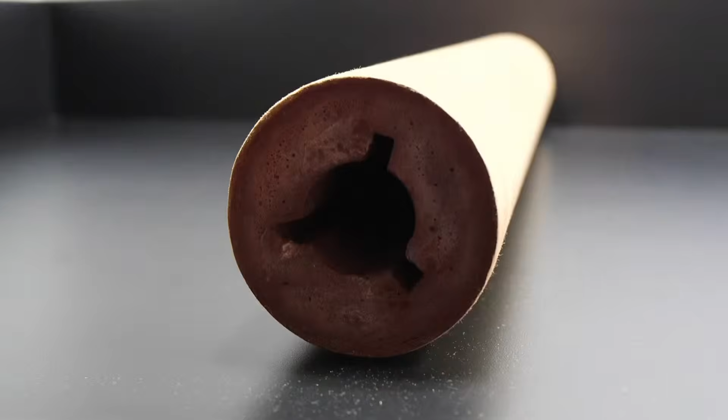So here's the propellant. If you guys haven't seen the video yet, this is how the propellant grain ended up - kind of a spoiler, promise me you'll go watch that video. You can see some of the patchwork on the finocyl side, but that's the grain. I actually don't have pictures in here because I didn't know if I was going to be able to post the propellant video today, so I didn't want to spoil it and show the cracks.

But there are some very small hairline cracks at the forward end, on the other side of the finocyl. It's kind of hard to index what's the forward and what's the back of the propellant, but there are some cracks, some very small hairline cracks.

What I haven't mentioned in the video is that I think those cracks came from the PVC deforming when it got hot - that was shown in the video. Once the PVC deformed, it got a little larger or smaller, and when trying to hit the propellant out, it cracked some of it. I didn't add that in the video because I wasn't 100% sure, but I'm pretty sure that's what it is. After taking out the actual core rod and feeling the core rod PVC, it's kind of wavy - nothing crazy, but a little wavy. I will need to work on that.

So I'm not entirely sure my actual lubricant didn't work - I did the dry film PTFE spray and also petroleum jelly. I thought that was the issue, but I don't think it was. I think it's the actual core rod warping and deforming, which made it hard to get out of the hole.

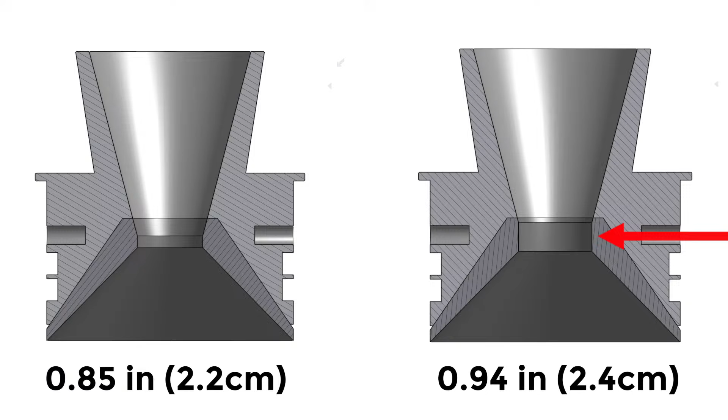I'm very confused with this. I didn't know it would have such little effect on total impulse, specific impulse, and thrust, which is around a 5% reduction. My OpenMotor simulation is pretty good, so I guess I'll believe it, but we'll see when we test this.

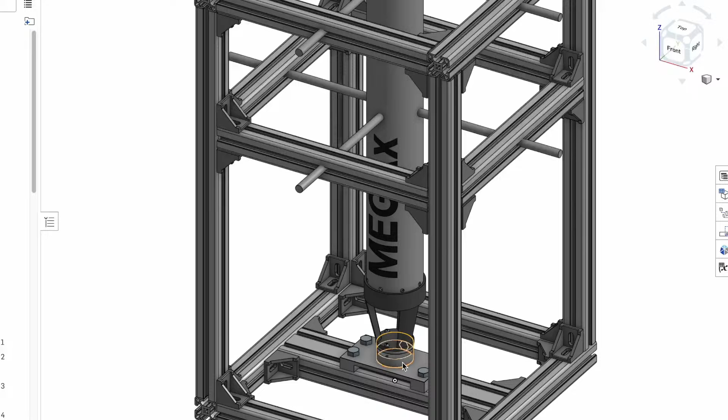4040 T-slot extrusion. If you don't know what 4040 T-slot is, it's what you're seeing in the video, 40 millimeters by 40 millimeters. It's a pretty good material, like Legos for engineers pretty much, because I can move stuff around.

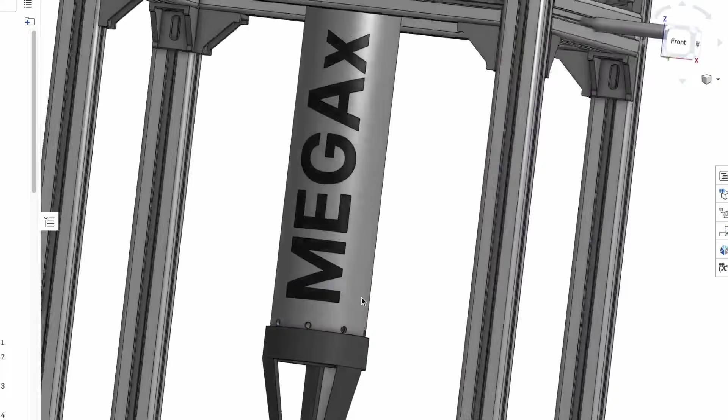You can see some brackets on it. If I pull up the video, you can see the corner brackets, those just screw in with bolts. I don't have the bolts and everything actually on this video, but with those brackets, if I want to make the test stand smaller, I can make it smaller. If I want to make it bigger, I can make a plate to connect two of the smaller T-slot extrusions. So it's pretty cool.

And now some more specifications. It's gonna be around 2.5 feet tall, 76 centimeters, and 1.7 feet wide at 52 centimeters. So it's gonna be a big test stand. I was gonna make it out of wood like my SN series test stand, but this is more adaptable and upgradable over time.

So now the load cell adapter. This is the load cell adapter, as you can see. I had something very similar, I wish I still had it, I just had it on my desk but I moved it. The load cell adapter is what grabs all the force from the actual rocket motor and pushes it down onto the load cell.

So I can get this arrow right here. The load cell's right here, the load cell adapter's right here, then the load cell's right here. And then, what did I call it, the adapter plate. This is the adapter plate too, this is something new that I haven't done yet. I'll talk a little bit more about that in a second.

So yeah, this load cell adapter pretty much allows the thrust from the motor to go through into the load cell. Also, there'll be a pressure transducer sticking out under here, it's not in there, but sticking out right here. So if we didn't have the load cell adapter, the pressure transducer would be the closest thing touching the load cell, and with the thrust it would probably just snap.

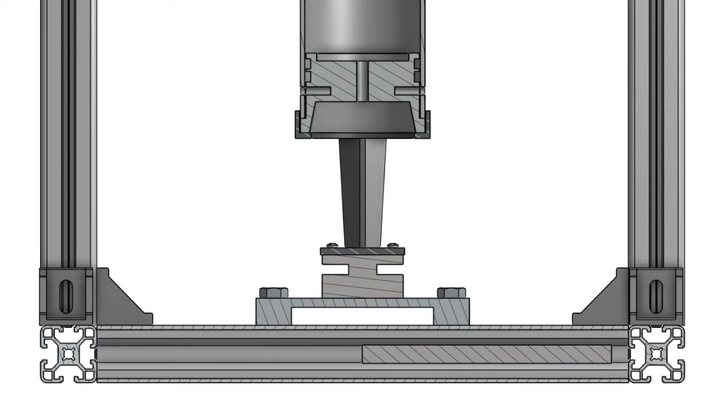Moving on - oh, here's actually a cool cross section, I forgot I had this in here. This is the cross section of what we were just looking at. Here's the arrow. So right here, that's the hole for the 1/8 inch, I think it's still 1/8, or maybe a 1/4 inch NPT thread pressure transducer. This will be threaded down maybe till halfway. I don't have it in the actual CAD simulation because it really doesn't matter, but the pressure transducer will be here down to here.

And this dark black - you can only see one strut of it, but there's actually 3 struts, you can only see one here. This feeds all the thrust into the load cell, which is right here - I'm using a circular load cell, not like an S load cell.

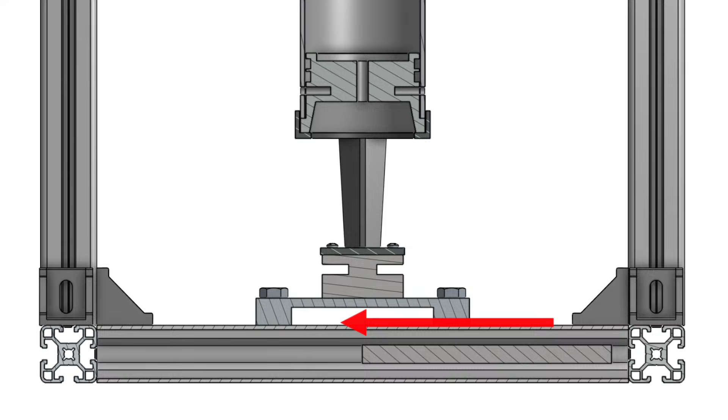And then here's the adapter plate, which will then move the load cell and mount it onto the actual T-slot extrusion, 4040 T-slot extrusion, which I haven't totally figured out how I'm going to mount this plate onto yet. I haven't looked too much into it, but I want to make sure I don't glue it or do anything crazy like that. I want it to be movable, which I'll probably just end up going with.

Yeah, so this is another view - we kind of already got that view. Here's the adapter plate. Right now, this model that I made with the adapter plate was probably made like 3-ish months ago. So I have just two bolts going down through it, which is probably what I will do, and just have an insert. They're hard to explain, I don't know - I honestly don't know too much about 4040 T-slot extrusion because I've never actually used it.

But this little threaded nut that I can slide within the tracks into, to screw down that plate - so that's what it's looking like. This is pretty much the future plan, this is next video's content - building the actual test stand.

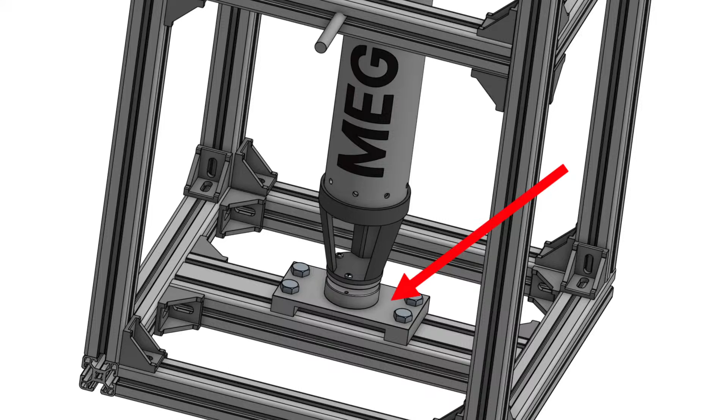On the test stand, currently I'm sourcing parts. The T-slot extrusion, like on Amazon or any US based company, is crazy expensive. So I'm looking at buying it from somewhere in China - it's way cheaper, but the shipping is very expensive, though it still works out to be way cheaper. Like the shipping's about $150, but the actual T-slot extrusion's only like $20 or $30. So they get you back with the shipping, but overall it's still way cheaper than if I were to buy it on Amazon.

I also need 2.5 foot segments of it on AliExpress. Yeah, that's exactly what I was looking at. I'm messaging people right now. I think right now all the T-slot is gonna cost around $50, and then shipping's like $150. So after fees and import fees and everything, I think it's about 250 bucks, which is quite expensive.

But this stuff is used everywhere. Free shipping - I will need to mention that to them because they quoted me like $150 for shipping, which is pretty expensive. But at the same time, all this actual aluminum, I think total was like 20 pounds, which is very heavy for shipping.

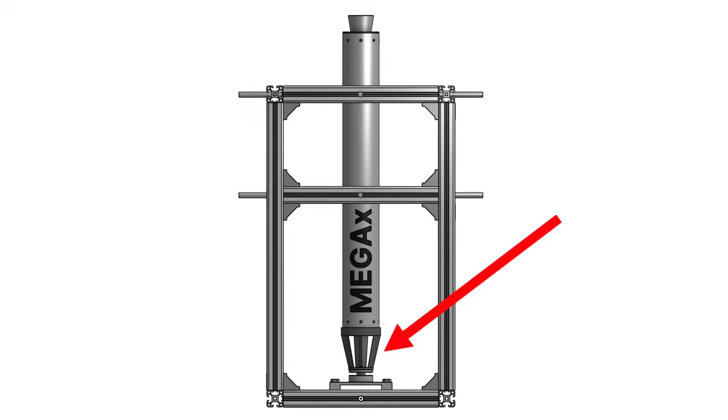More about the test stand - in the future I want to have thermocouples, which are just like thermometers, to take temperatures inside the rocket motor and maybe on the outside, and then that will feed to the Arduino. I also want to mount cameras onto this test stand someday because it's very hard to index video with the data, because the video is just taken from a camera and then the data's filed on the Arduino. So I want to get one camera that films on top of the data to the Arduino so I can perfectly index that video.

I've gotten it really close with the beeps, because I have my Arduino do a beep when it's armed, and then my cameras - you can hear the beep on that. But I just really want to have more cameras, maybe not really high resolution ones, maybe like an FPV camera. I can actually - I'll be back.

I used to fly FPV drones a bunch, so I have a bunch of them. But like just a camera like this - this is actually an HD camera, this is a SharkByte. I love flying these drones, I just haven't had any time, and also the batteries degraded and they're very expensive. So just a small camera like this on there - I can honestly take this camera out, it just unplugs. I got the Mr. Steele props on it, if anyone watches any FPV content. But yes, this is three of them, I built all these, I have a bunch more.

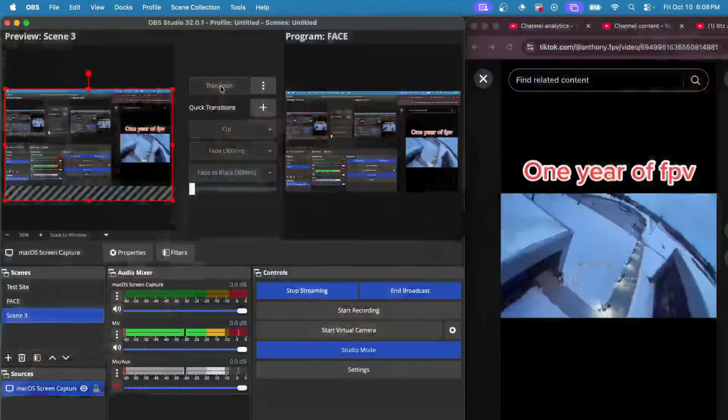Let's move over to scene 3. So transition... back real quick.

Okay, what's going on here? What's going on? Yes, remove this. Ever go to... where is that?

Large dangerous rocket ships. I mean, I've been to Starbase twice. Maybe we can consider that as large dangerous rocket ships. Maybe it's pretty dangerous. But yeah, I've been to Starbase twice. The first time I was not able to see a launch, but the second time I was able to see a launch, which is pretty cool.

I saw Flight 7, it's crazy that Flight 11 is just in a few days on Monday. It's going to be cool. V3 Starship's going to be really cool once we see that come out. But I'm very excited for that flight.